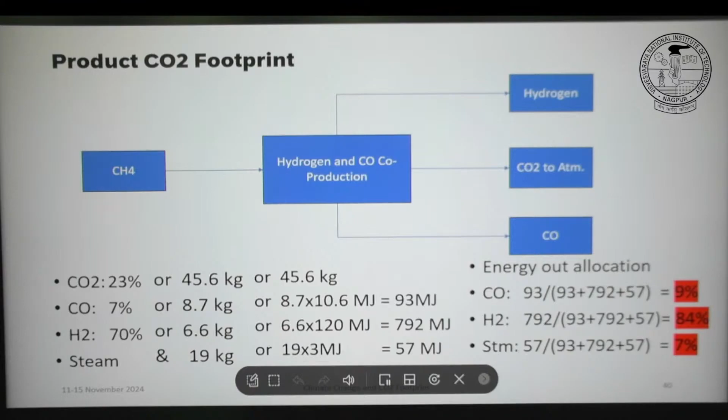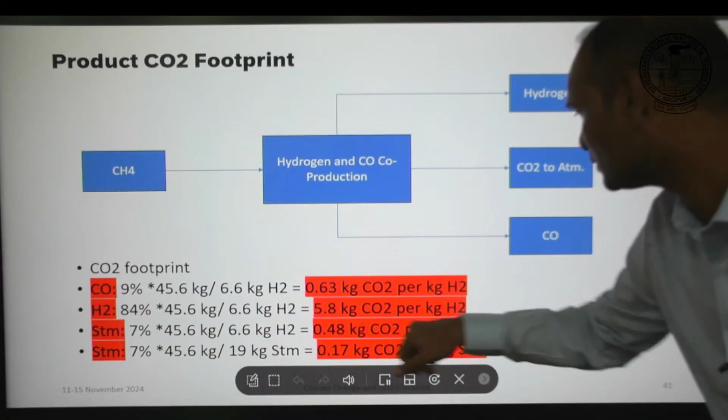And similarly, we just extended it for the steam as well. We did it for hydrogen and CO earlier assuming no steam co-production, but now we have steam as well, and that's how we do the same.

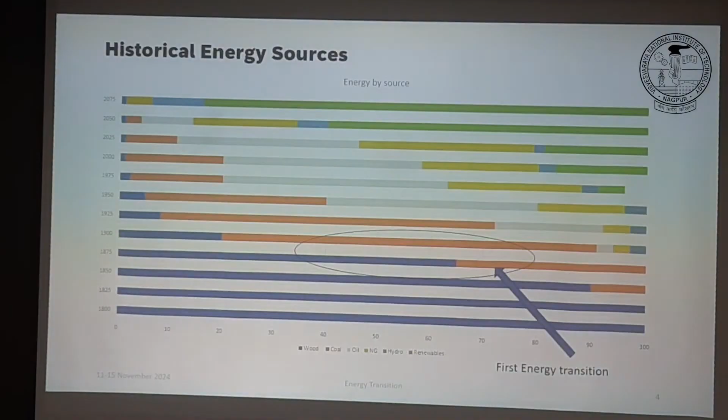Look at the jump here, and that's what they call energy transition. Within 10 years, 20 years, 30 years, we suddenly move from one source to another source. That was the first one, and the next one came somewhere around this period when oil was discovered.

This was the first one with coal, and then suddenly somewhere around 1910, oil... once again, it was discovered much earlier, but it was not started as a major energy source until the early 1900s. Then here also you could see this color is for oil, how it grew during this period. That was the second energy transition.

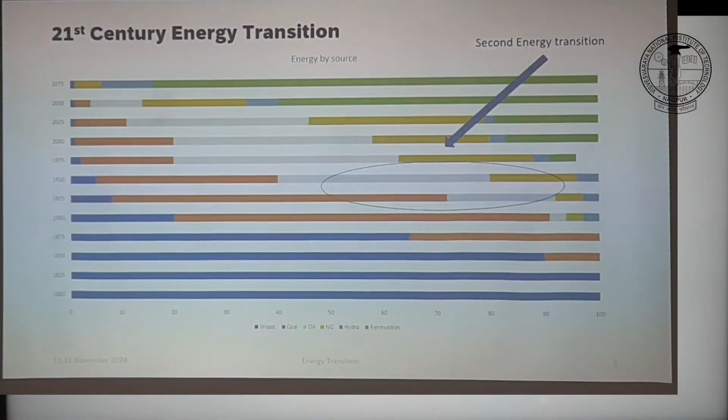Now we are witnessing, we are today talking about actually in reality the third energy transition, but most people think it's a new term, energy transition. I think we saw this slide earlier, no, not yet. And we saw some issues associated with the carbon intensive fuels.

Here on this slide you can see the deaths associated with air pollution using different energy sources. Once again, the area of the rectangle, no, that's per unit of electricity produced. So coal, as you all know, it's not only CO2. CO2 has GWP, global warming potential, but burning coal also results in several other pollutants like SOx, NOx, particulate matter.

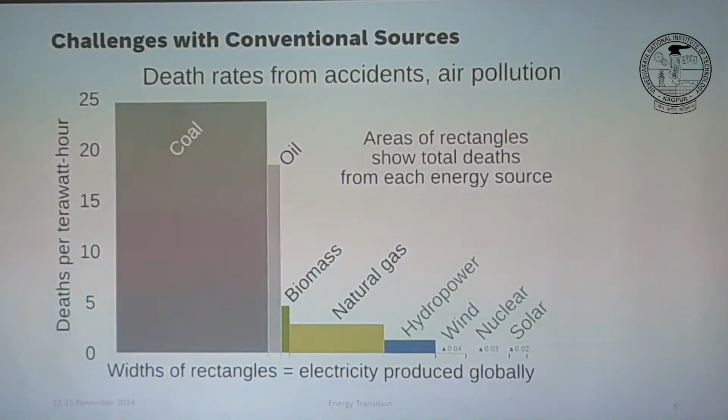So as you go cleaner, it's also safer, you can say safer or healthier. This we already saw. So the need of the day or call of the day is to go from a higher C to H ratio to a low C to H ratio. On this end we have infinity, on this end we have almost zero.

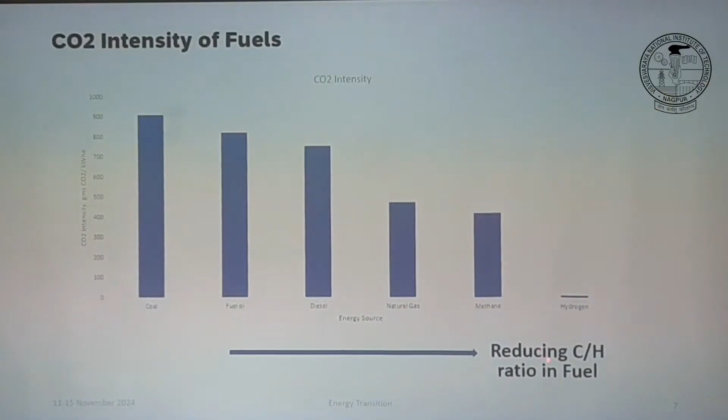I'll skip this slide. We already saw where this energy is coming from. Still coal has a share, then gas and the remaining oil and some other sources. And you could see the renewable or clean energy sources still don't make up so much of the complete energy mix.

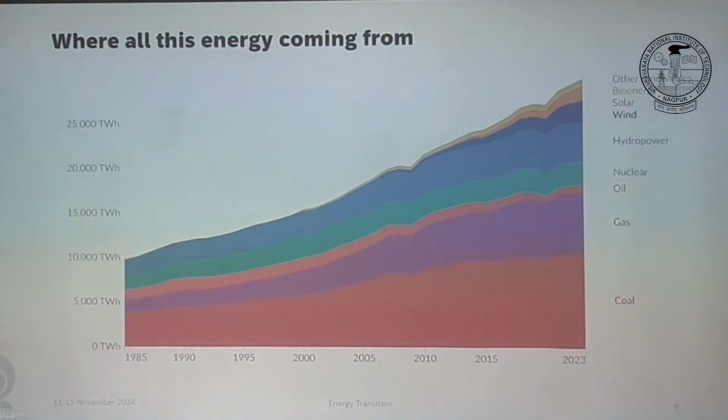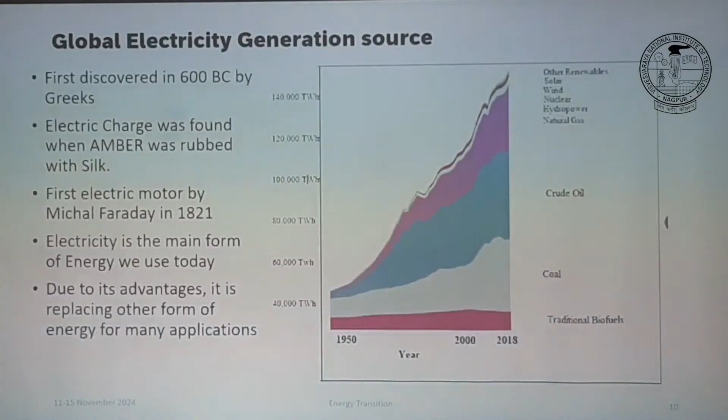Yeah, electricity. So we said where this CO2 emission is coming from, the majority is from electricity. Everybody thinks that electricity was discovered somewhere in the 1800s. Inherent advantage, transferred by a cable. There's no transfer of material, and it suddenly took over a huge amount of energy production and energy use after its invention.

So once again we'll look into the current electricity generation. So this we already talked about. We burn fuel in the boiler. It's the simplest form of power plant. Can somebody tell me why do we have to condense the steam after the turbine?

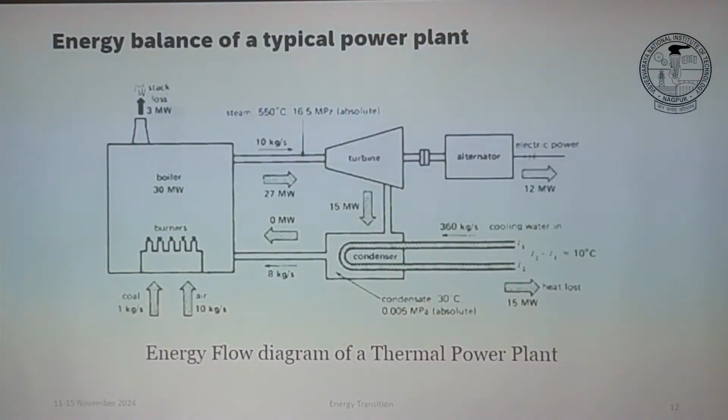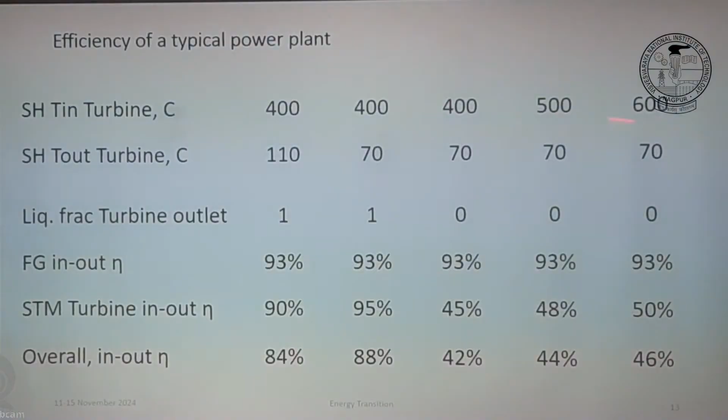So as we said, we reduce the energy content of the steam coming out of the turbine, but we are at 70 degrees. So what's the boiling point of water at 1 bar? 100 degrees. So 70 degrees means we are already under vacuum. And here, there is a limit. Another way is you put in more energy at the inlet. So you go to 500, 600, and here you could see efficiency is going up. This one stays the same. We assume flue gas is coming out at the same temperature from the stack, and we are just varying the superheated steam temperature.

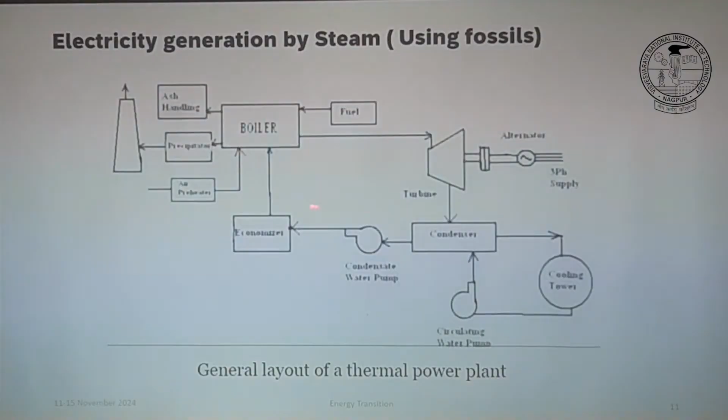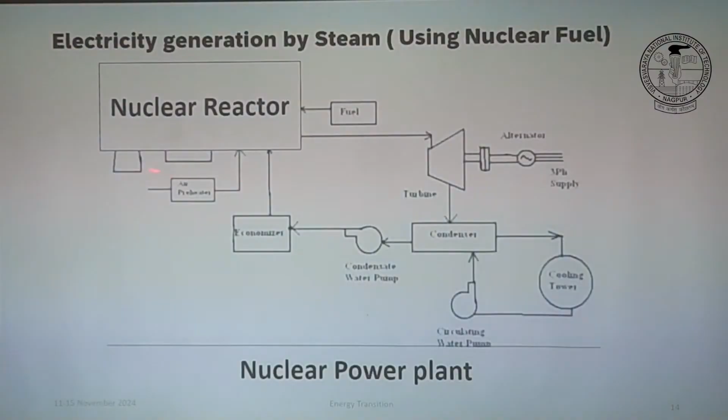So what we are doing here, we are burning fuel. Chemical energy of fuel is transferred to thermal energy, to the steam. But instead of using fuel which contains a lot of carbon, we can use a nuclear reactor and harness nuclear energy. The rest of the whole cycle is similar. It's just the thermal energy supply medium is different. In the earlier case, it was burning a carbon-containing fuel. Now it's the nuclear reactor.

Another way of generating electrical energy is hydro. Hydro's share in the overall electricity mix in India is a little bit higher than the global average, because we are blessed with a lot of rivers, and we are also blessed with advantageous terrain. You don't just need rivers, you also need terrain that has some slope. Here you could see. The basics of hydro generation everybody knows.

But as I was saying, we are blessed with such terrain that at a certain point we have a higher level, and 200 meters later we have a lower level, so we can make use of this potential energy difference: make a dam, stop the water, and have a controlled flow of water from high level to low level. By this you turn the turbine and generate electricity. So up to this point it is similar to the other two methods. It's just the energy is not transferred by steam but by water, and it's not thermal energy but potential energy.

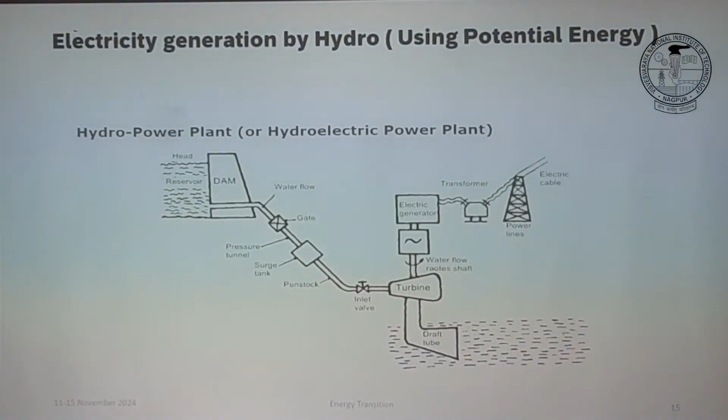Now comes the sun. So global solar radiation, how much solar radiation we receive at ground level. So global average is somewhere around 1300 watt per meter square. But the problem with solar is it's not shining 24 hours a day, 7 days a week, 365 days a year. But if you have natural gas, you can burn it 365 days a year, 24 hours a day, 7 days a week. So it's continuous supply of energy.

Extract natural gas and have continuous supply of energy. That's the problem with sun, solar energy. It's only, you could say, the daily 12 hours of daylight, night time, but there is also a disparity between locations. Once again, in India we are blessed with more sunshine than some other countries. So if you go to Scandinavian countries like Norway, sun rises somewhere around 9 a.m. and it's already dark. It's only 6-7 hours. That's in winter.

But we have year-round sunshine, and some other countries like Middle Eastern countries, South American countries, they are also equally blessed. Some countries even better than us. So if you look at the potential, you could see the solar to electricity generation currently is somewhere around 20%. So the solar PVs what we have nowadays, the efficiency is somewhere around 20%. And a lot of research is focused on increasing the efficiency of solar PVs also.

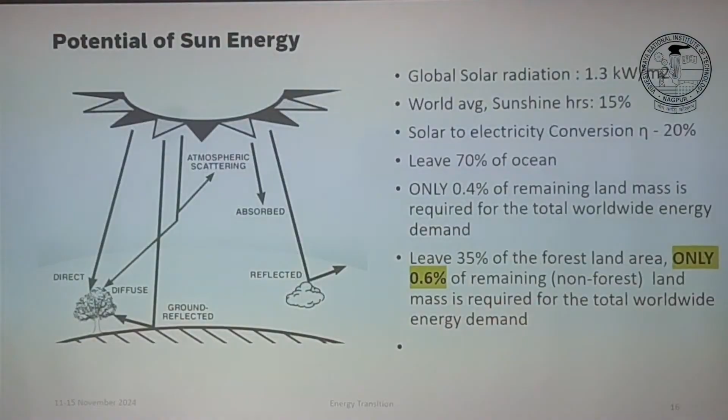Then there is wind. So we started with coal or natural gas, the steam cycle generated power, and went to the nuclear, hydro, solar. So we're just looking at each and every source of power generation. So that's wind. So we all know that the specific heat of soil is much lower than specific heat of water. And the sun is not distinguishing between sand, soil and water. So the solar radiation is similar. That means for the same amount of energy hitting the ground and hitting the water, the water will be at lower temperature.

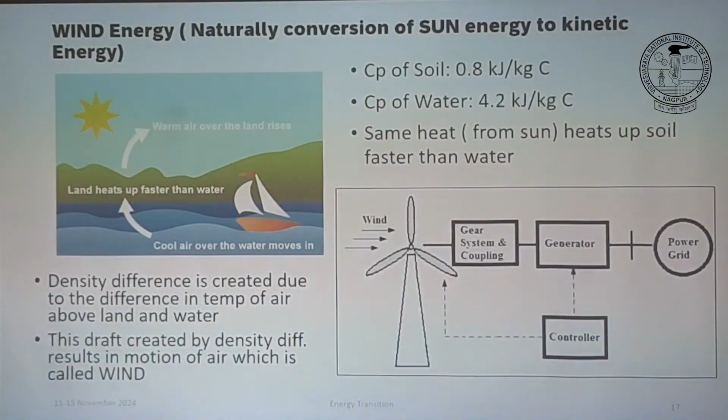So similarly, the temperature of the air over the water is lower, and that creates a density difference and a natural draft, which later on turns into what we see as wind. And this kinetic energy can also be harnessed. So once again, like hydro, it's the potential energy of the water due to the grade difference. This time it's the kinetic energy of wind, which is used to turn the turbine and generate electricity.

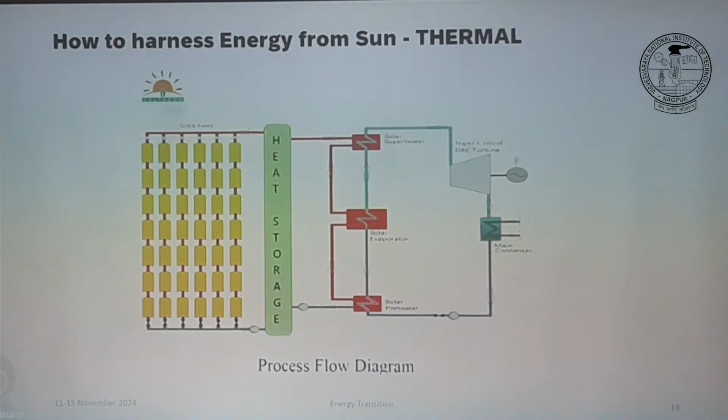So there is another way of harnessing the sun energy directly as thermal energy. So you generate steam via thermal energy absorbed from the sun, and once again turn the turbine to generate electricity. From the sun, the first one was about the thermal energy, but thanks to the invention of PVs, you can directly convert the solar energy into electrical energy. That's the much more efficient way of generating electricity from sun.

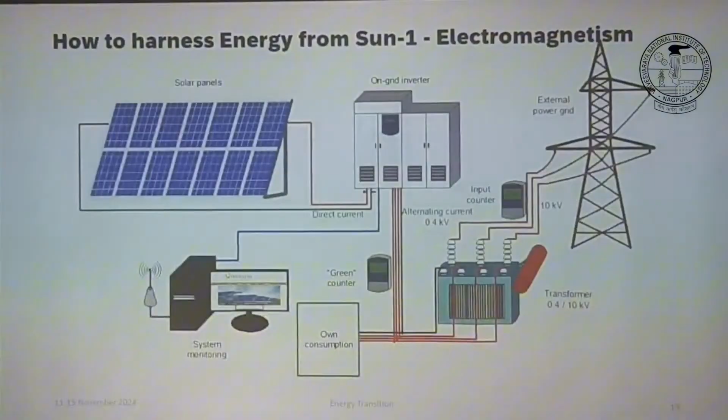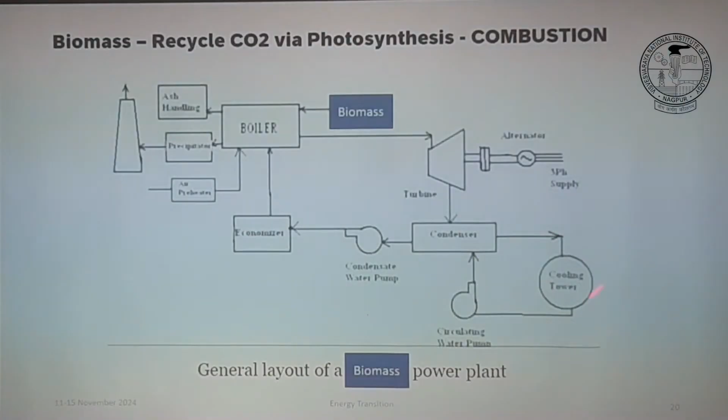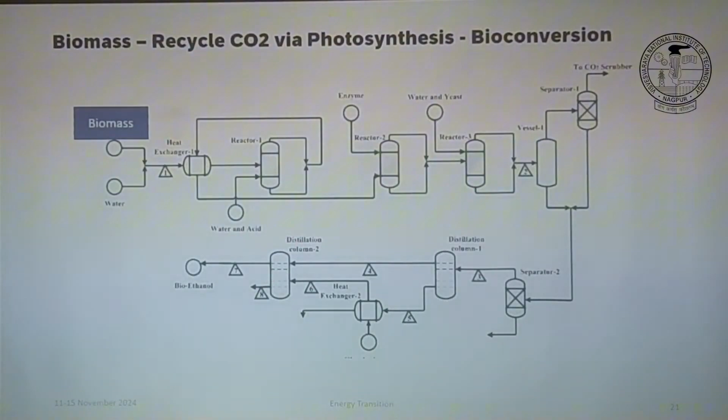So coming back to the first source, here we had coal. If we replace this coal with biomass, we could apply the same cycle and generate once again electricity via steam cycle. Okay, then there is another way of using biomass. Instead of having this thermal cycle, you can have the bioconversion to some fuels like bioethanol. You use biomass and convert into a suitable fuel like ethanol. I think this we already discussed.

There are so many hurdles moving away from conventional energy sources. So I think this we didn't talk about. Oil and coal-based power generation this society has been doing for last almost 100 years. And it's a very well established technology. Oil and coal still has abundant supply. There's a lot of reserves still available. So it's also once again the political aspect into this. To promote the green energy and to promote energy transition, people are saying we do not have oil left, but fact is there are still a lot of oil reserves and gas reserves left, even coal.

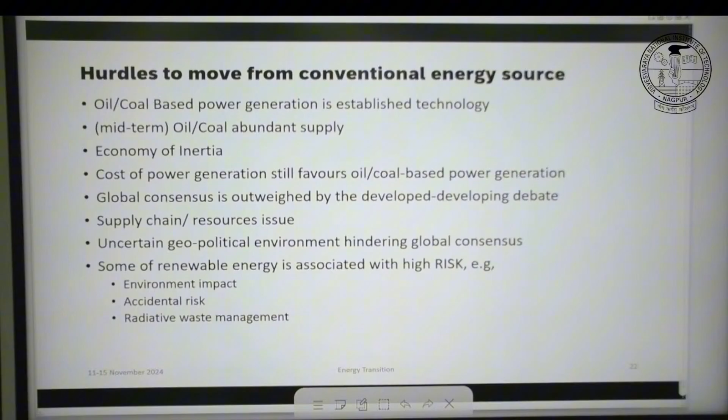So as we were talking before lunch, societal inertia, personal inertia. There is also economy of inertia. So who will pay for this extra cost? I've been doing this for years, so I'll continue to do this. Difficult to convince people, society. Cost of power generation still favors oil, coal. We saw already the economics, 174 versus 79 euro per megawatt hour between natural gas and coal. So who will pay for this extra cost?

Supply chain resources issue. So these are new technologies. That's true. Uncertain geopolitical environment. We are living in a world where we have so many fights going on, war going on. I think 50 years back the governments were more aligned than today, so that's also.

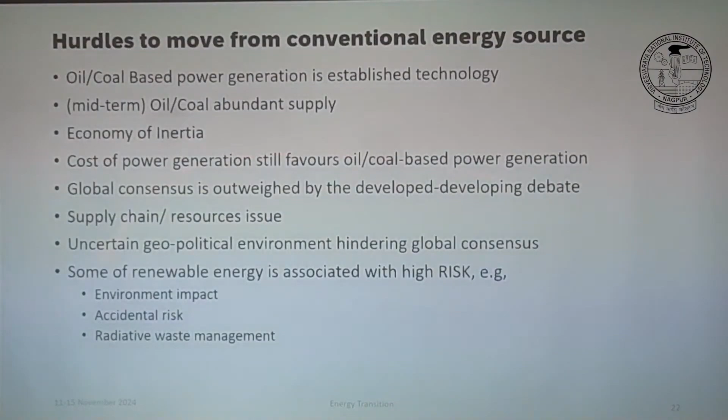We touched upon nuclear power. Nuclear power is a, let's say, potential clean energy source, but there are so many risks associated with nuclear energy. Just to mention some of them, accident is a big thing. The Japanese accident has really scared many governments, and most European governments have already decided to shut down all their remaining nuclear plants.

Now let's do the calculation we did in the morning for these two locations, one where we have 2,500 hours per year, like India or some other country, and one location with 1,200 hours per year. The capex of the solar panels, for the sake of simplicity, I assume similar. As we were discussing in the morning, the capex, the money you spend, you have to pay back. So we normally use a capex factor, 14%, based on the rate of depreciation and the interest rate you assume. Based on these assumptions, at one location, using the same energy source, I have an electricity price of 174, on the other one 84. So huge dependency on the location.

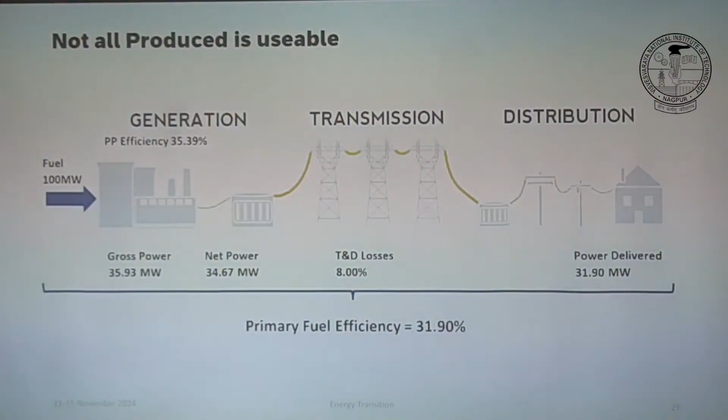So one can say, okay, let's produce power at this location and transfer it to the location where you do not have so much sunshine. But the problem here is we have a lot of transmission and distribution losses. It can add up to 8%, and this number is for, if I remember correctly, some 1,500 kilometers or so. But as you go intercontinental or interstate, you can have almost 30-40% loss. So whatever you are generating at one point, almost 40% is lost before you receive it on the receiver end.

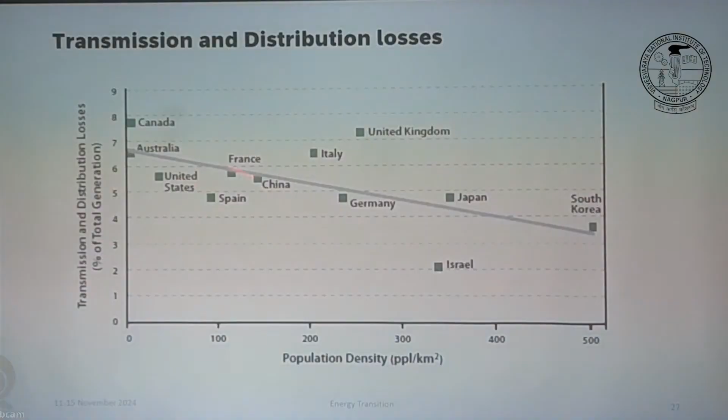And here you could see the transmission losses also depend on the population density. If you have high population density, you do not have to travel so much, so your losses are low. High population density, lower losses. I don't see India here, but we are also somewhere in this region, so higher losses.

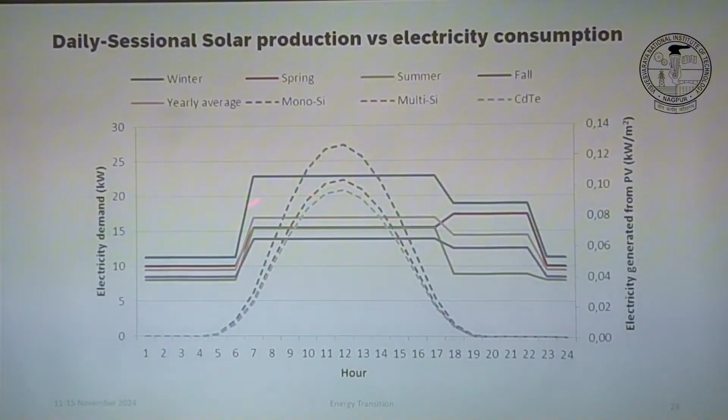Now how we can solve this problem is with a hybrid solution. You can have natural gas based power production and solar PV based power production, right? During the period when you do not have any solar power production, you turn on your natural gas power plant and generate the power required. But what will you do with the additional power generated during this period, because here you have much more power production than what is required, right?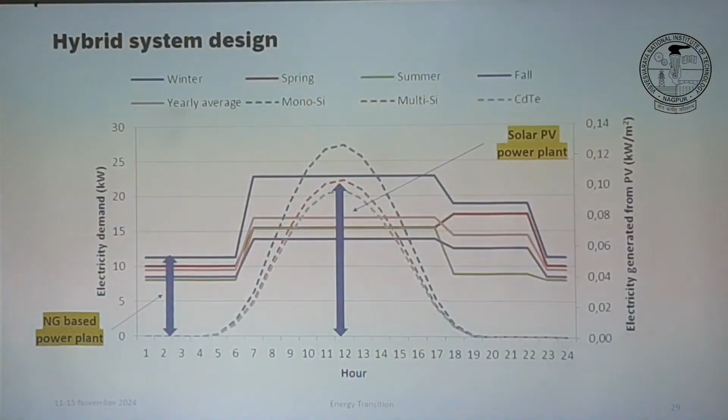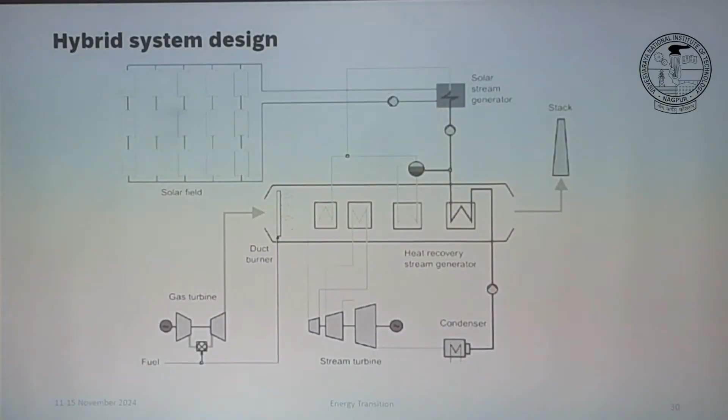So here you could see we had the same natural gas based power plant. You have the fuel, the gas turbine, steam cycle together, and on the steam cycle you add the solar electricity, right? So when we do not have solar power, we can generate electricity via natural gas, right? And during the period when we are generating more, we can store the energy in batteries. So this is hybridizing a natural gas power plant, solar PV, and even battery storage.

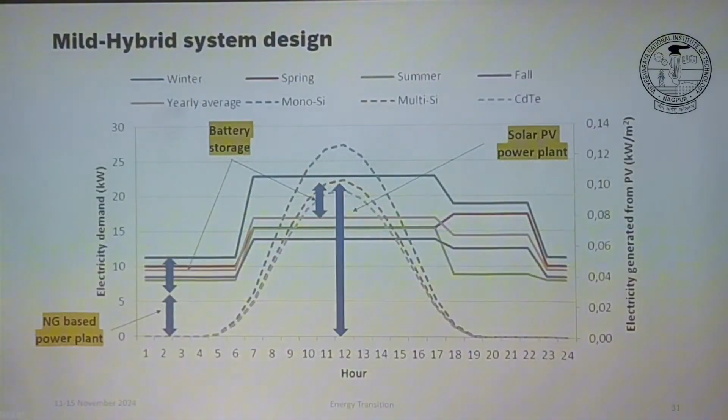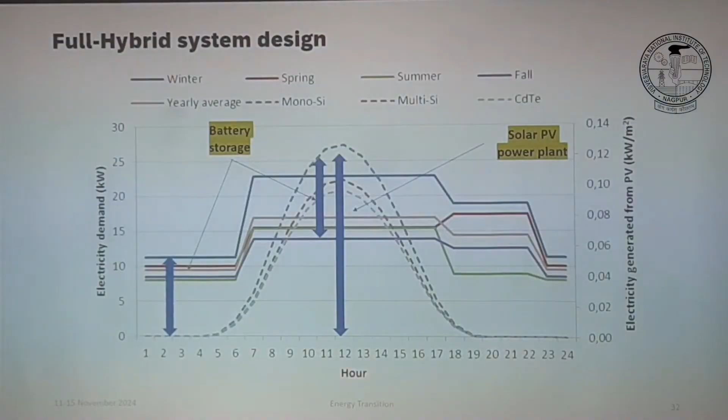So combining solar and, say, fossil-based power generation gives synchronization of supply and demand, a solution for the intermittency problem. These are expensive. You could imagine if we have only natural gas-based power production, you just install this much capex. But if we have a hybrid solution, you have to install capex for solar power production and also for the natural gas-based power production. So of course your capex is much higher. That's what we have here in point number 3: high capex compared to standalone NG-based power production.

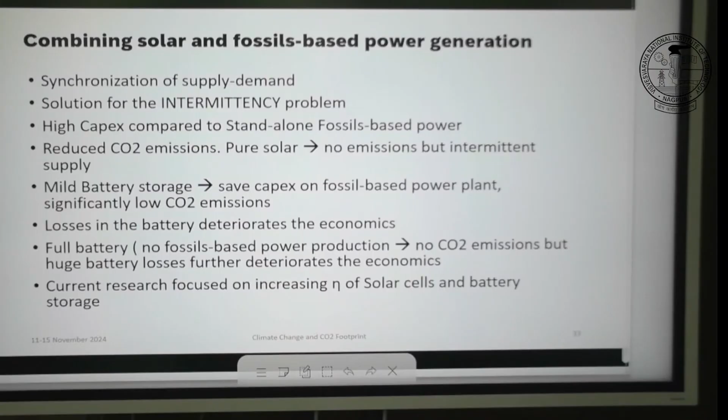Reduced CO2 emission: pure solar means no emission, but during the time when you are running your NG-based power plant, you have some. So you can go from pure solar-based power production up to pure natural gas-based power production, something in between based on the ratio of power supply between these two sources.

Solving this intermittency issue using batteries is also gaining momentum nowadays. But the problem with the battery is the losses, which deteriorate the economics. And we are talking about losses not in terms of weeks or months, but in terms of hours. So whatever you store in your battery, you will not get the total power even the next day. So full battery and solar power, that's I would say still far away.

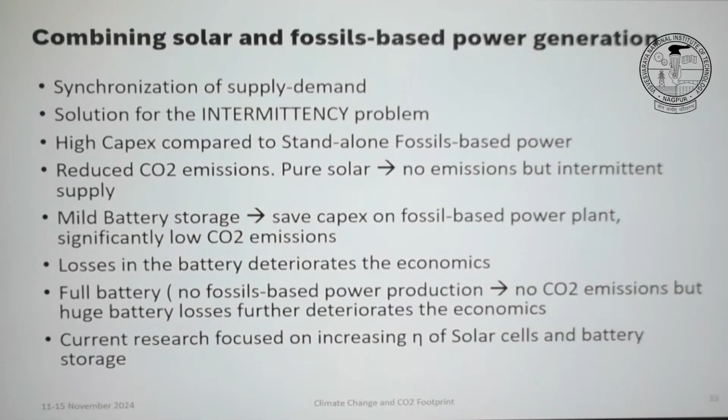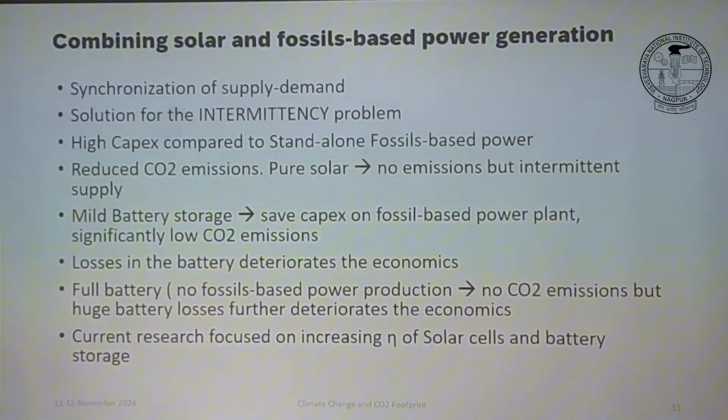A lot of research is also focused on increasing the efficiency of solar. At the moment it's somewhere around 20%, and if you increase it by 2%, you suddenly increase the power production by 10%. So 20 to 22 is only 2% in terms of efficiency, but the power production will go 10% higher. So a lot of focus is currently on increasing the efficiency of solar cells.

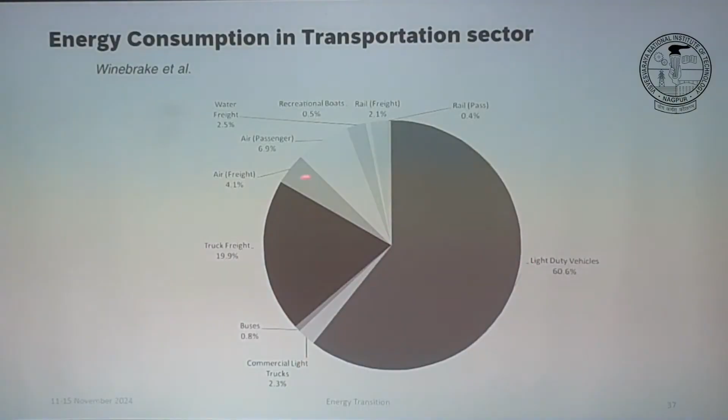So far we talked about electricity. A major part of the total energy use is for electricity, so that's what we talked about. And this is for transportation. Here you could see the majority of the transportation energy use is within light duty vehicles. Another big share is freight transport. And somewhere here is water transport and air passengers.

And where is all this energy coming from? The majority is coming from crude oil, basically via gasoline or petrol. Then the heavy distillates, that's diesel, jet fuel, aviation turbine fuel. Natural gas, compressed natural gas, also.

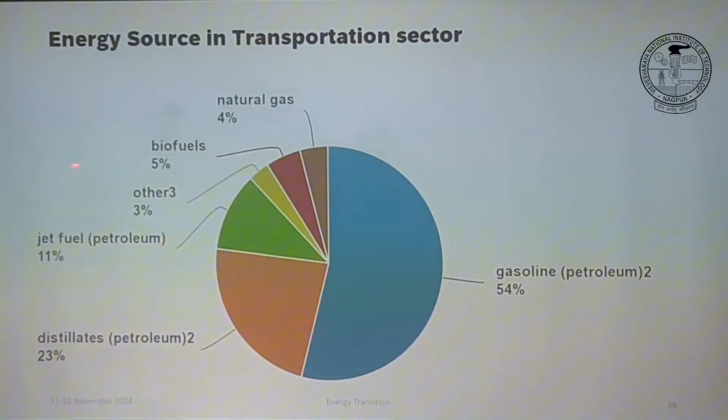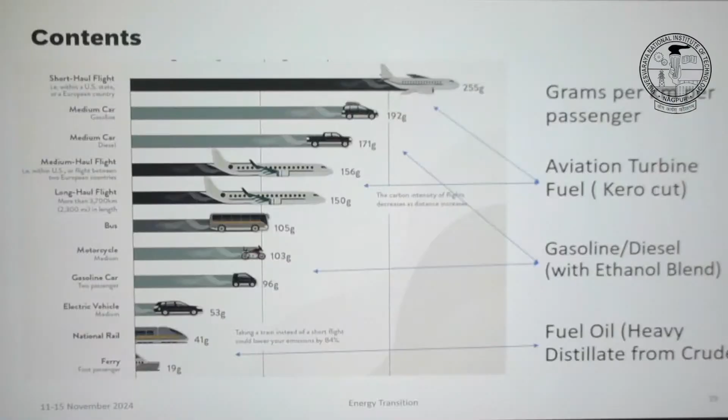Here you could see how much each mode of transport is polluting. That's per kilometer, I guess per kilometer per person, and air transport is somewhere around 255 grams of CO2 emitted. And look at the train, compared at 41.

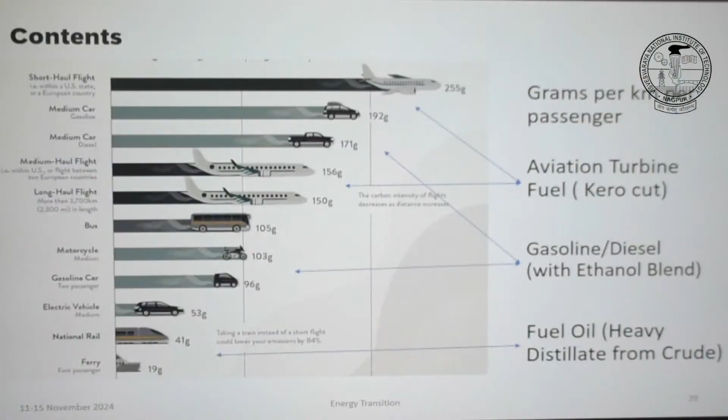Can you please go back? Yeah, sure. Question? Flight is taking a high share. Yes. But for intercontinental transport, we can't avoid this mode of transportation.

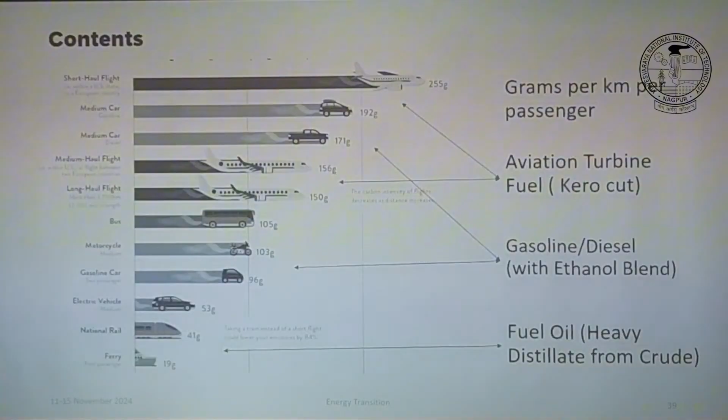Now, probably you are all already aware, even in India we have so many EVs nowadays. Countries are already moving from gasoline-based passenger cars to electric vehicles, and here I'm showing how this rapid growth occurred in the last 4 or 5 years. Look at the graph, exponential growth over the last 5 years. And on this front, China is actually leading. Look at the exponential growth China had compared to some other countries.

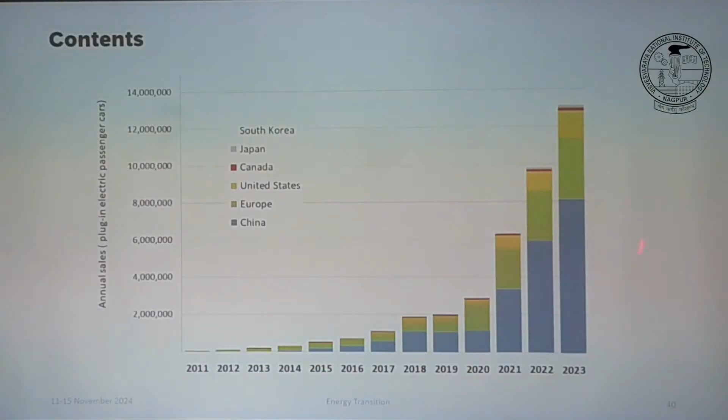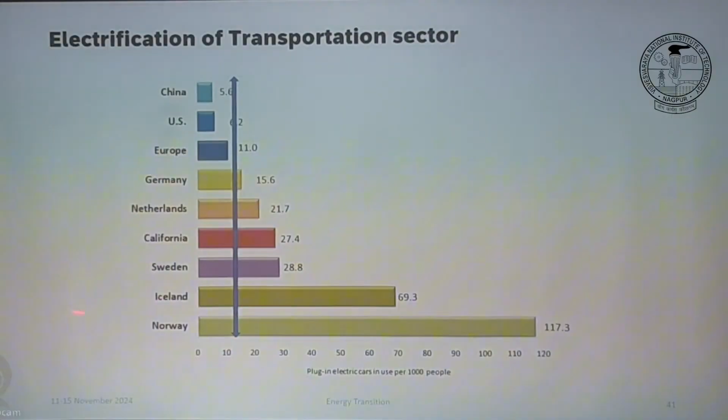Once again, electrification country-wise: that's plug-in electric cars per 1,000 people, and here you could see Scandinavian countries are much ahead of others. So rapid growth in the last 15 years, but the issue is capital cost is still higher. Buying an electric vehicle still costs 20% more than buying a similar gasoline vehicle. Government subsidies promote EVs.

So even if you can buy an EV today at 20% higher cost, the problem will be the infrastructure. The range is small and the infrastructure is not there, so you will not find charging points. It's getting better every day, but infrastructure is still not catching up with the rapid pace of EV sales.

Early pushback from the auto and oil lobby: the oil industry for obvious reasons, because they don't want to see their sales dropping. But unfortunately, in the early phase, the auto industry was also not so interested in moving from gasoline engines to battery-operated electric vehicles. But now they are coming up, and a lot of new EV models are coming.

Gasoline technology is a mature technology for all kinds of transportation or vehicles. EV is already mature for light vehicles, but not for heavy duty transportation like trucks and other things. So we need a different solution for the heavy duty sector.

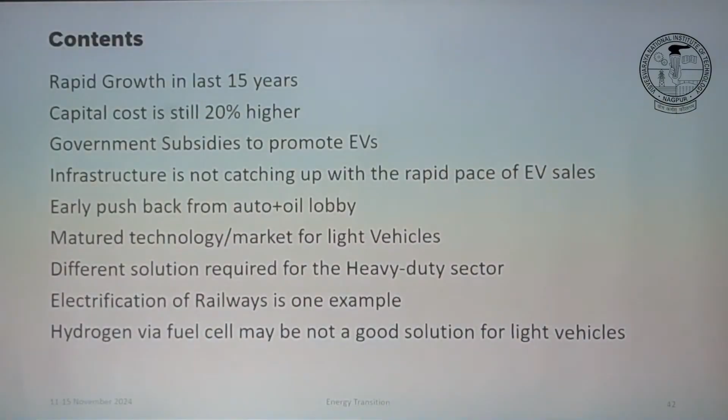Electrification on railway is already one example. So hydrogen fuel cell maybe it's not a good solution for light vehicles, because the capital cost of buying a hydrogen fuel cell vehicle is almost 2.5 times compared to a gasoline vehicle. Operating this hydrogen vehicle is also 2 times expensive. So operating cost is high, buying cost is high, and on horizon not enough hope or possibility of bringing this cost down. So probably hydrogen for mobility is not a very good solution, especially for light duty vehicles, passenger vehicles.

So EVs for two-wheelers. Because hydrogen buses are there, hydrogen on the heavy duty side, it's good, but for the light duty it's not, because hydrogen refilling stations are still not developed yet. Even in Norway, there are not many hydrogen refueling stations. So that's the aspect I touched upon, that the infrastructure is not catching up with the auto industry. So they need to synchronize as well.

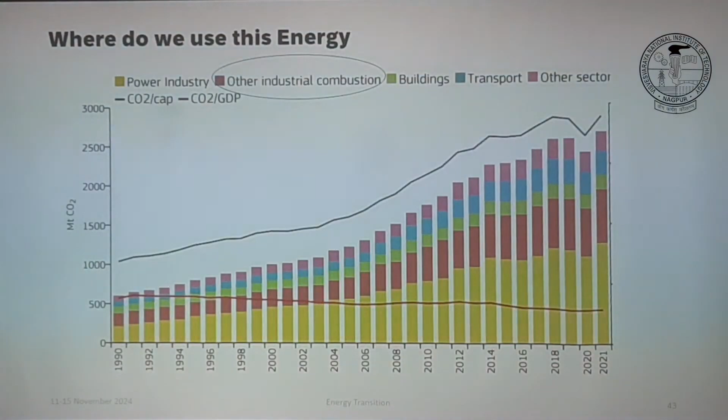So we touched upon power industry, we touched upon transportation. Now we look at the industrial consumption. Different forms of energy are used within the industry. One major is thermal energy, and there we saw it's basically natural gas. Coal is more towards electricity production, but in industrial energy consumption, it's mainly natural gas. So predominantly it's electrical, but also thermal as heat. And electricity, we know, is used for running pumps, compressors, and other such uses.

Now electrical, we already saw we can replace this electrical energy supply from coal, natural gas to renewable power. So this is already cleaned up. And thermal energy, we need within industry at various temperature levels. So you could imagine if heat is required at a lower temperature level, the steam can be generated directly using green electricity. But if you need energy at a higher temperature level, you cannot replace it with electricity, because supplying energy at higher temperature level via electricity is much more expensive.

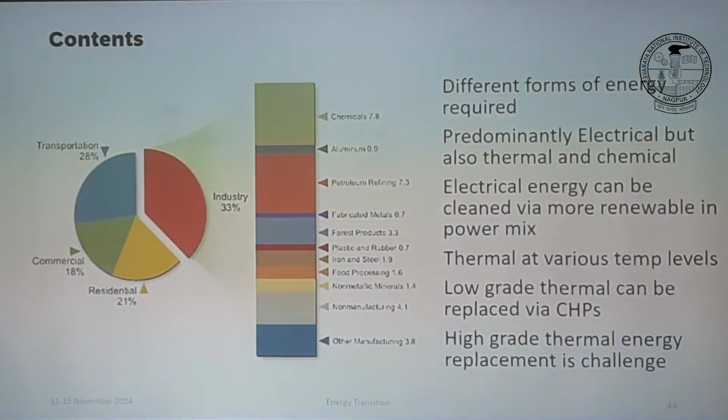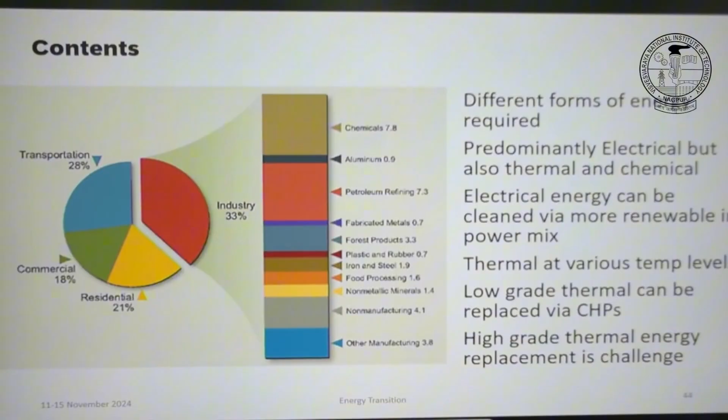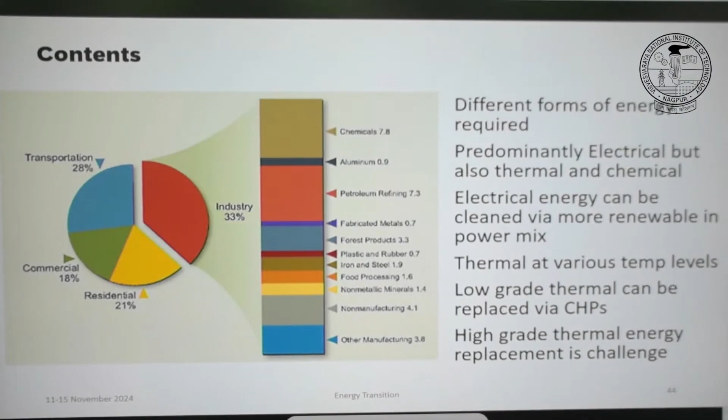So 20-30 years back, we saw that the efficiency of this thermal power plant was 40%, and that was because of this inherent reason we cannot have condensation within the turbine. That's why a lot of energy in steam is lost in the condenser. So 20-30 years back, they came up with the idea, especially in Western countries where you need a lot of domestic heating: instead of condensing it in a condenser via cooling water or cooling tower, they would supply this energy for district heating. That's a combination of heat and power, called CHPs. So you do not waste your energy to atmosphere, but make useful use in domestic heating, thereby replacing natural gas which would normally be used to heat up homes.

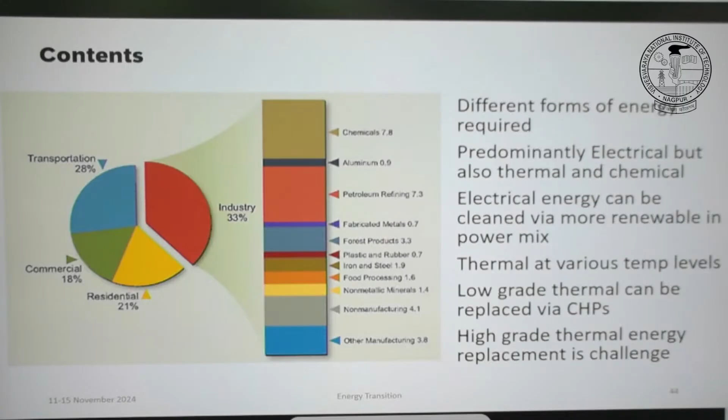So at lower temperature, that's easy, but high temperature heat supply, that's a challenge. We talked before lunch that cement is an industry where you need to supply a lot of energy because calcination is highly endothermic - a lot of energy needs to be supplied. Another example where you need heat at very high temperature is syngas production and the iron industry. These are industries where it's absolutely not possible to replace conventional energy sources like coal and natural gas with electricity.

We saw the example of cement, CO2 release from the process - that's a challenge. These are hard to abate industries. Limestone calcination is responsible - if we look at the CO2 emission from a cement plant, almost 65% is coming from limestone and only 35% is from fuel use, although it's a highly endothermic reaction. Until unless we find a replacement for limestone, we cannot avoid this emission. And it's highly endothermic, with a lot of CO2 released within the process, and the optimum reaction temperature is also 1400 degrees - that means we can also not replace this energy supply with electricity.

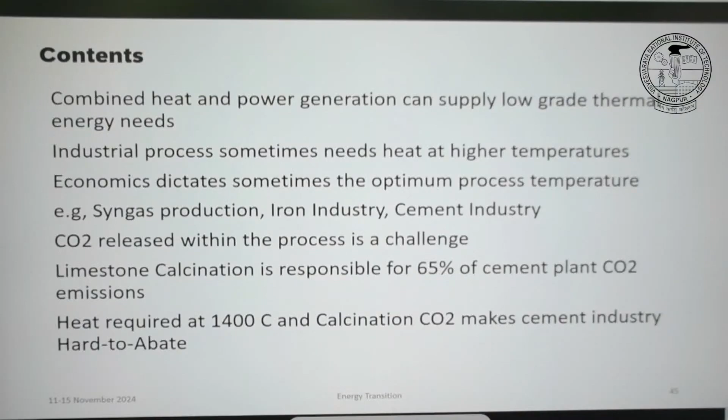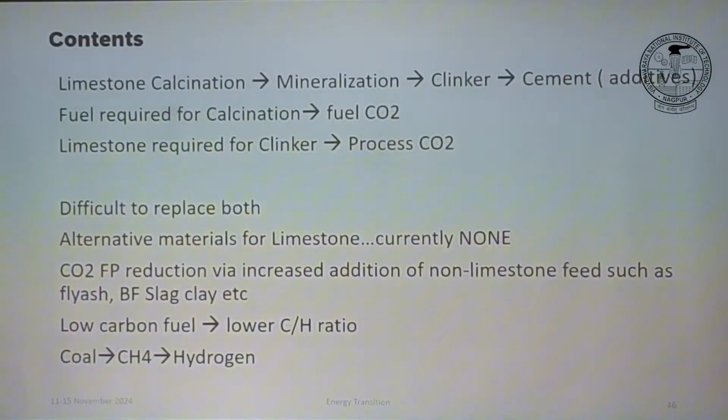So we continue to supply energy via conventional energy sources. I'm just speeding up - any questions so far? Okay, I have pointed out some things regarding this.